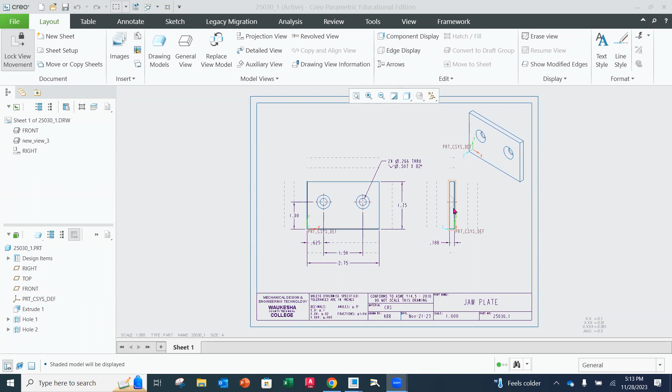Yeah, I don't know, I guess the markup I got for it was to change it. Let me see if I can go find it. Yeah, I think if I remember correctly, David, and not to share your grade or anything, I believe the comment was, when you look at this view right here, there wasn't enough edges to really see everything, kind of blended together.

Let me see if I have my... what number is it, 60? Yeah, it's 60. This one? No, it's not, that's the vice screw, I had 2 questions on that one too. 50 is the sliding jaw.

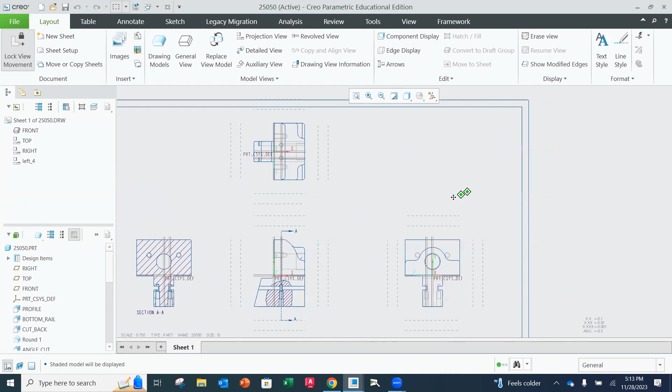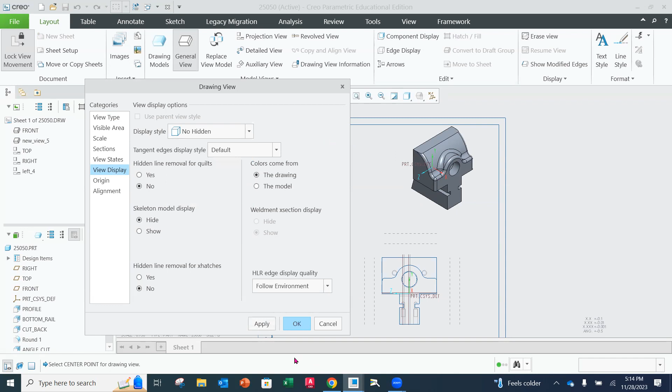Okay, so I don't have this drawing completely done, but let's put a general view up in the corner here and we'll add it and see what comes in. So right now this is going to be the display, it looks like it's just shading. I would add shading with edges at the very least, okay, because it gives you a better view of that. The one that I like the best is going to be the no hidden, I think that's what it is, like this. But it does have those.

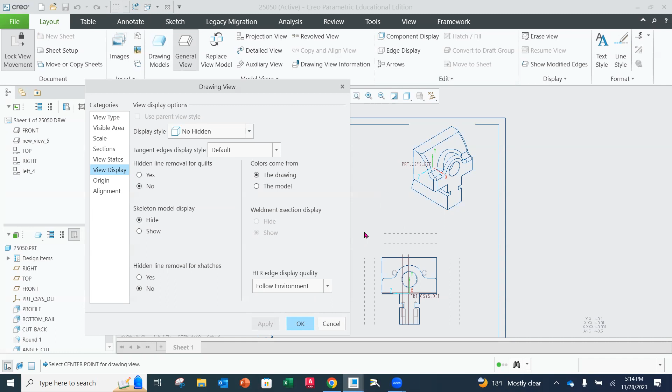I don't think there's a law against it. Again, this view is just icing on the cake - we can actually leave it off, it's not required to put it on at all. But I like seeing it because I think it adds a lot, especially for people dealing with your drawings who aren't as versed in the mechanics of visualization. It helps a lot, so I think it's nice.

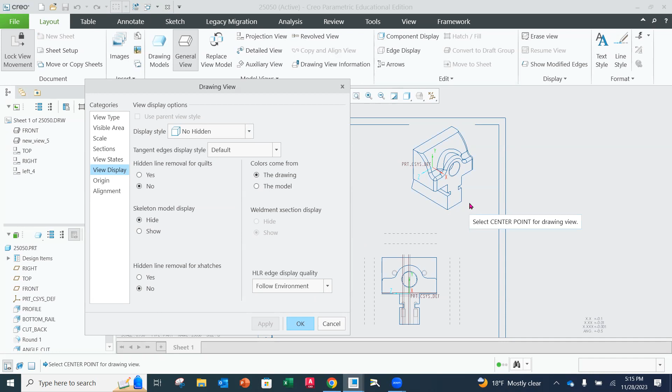But what you can do if you want to mess around with it, I actually cover this in this video for the individual drawing. Oops, I didn't save it - hold on, general view, let me go back in.

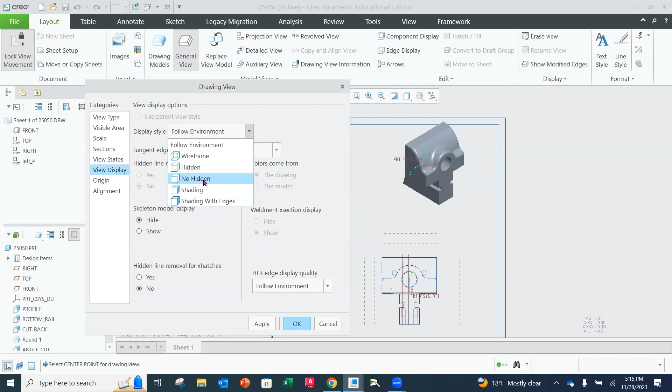So I set it to phantom because years ago I learned that tangent lines, if they're on the thing, can't be shown as object lines. So I made it a rule that if you had to show it - since that was a major part of seeing what it actually looks like - to make them phantom lines, just so there's an indicator that it's not an object line.

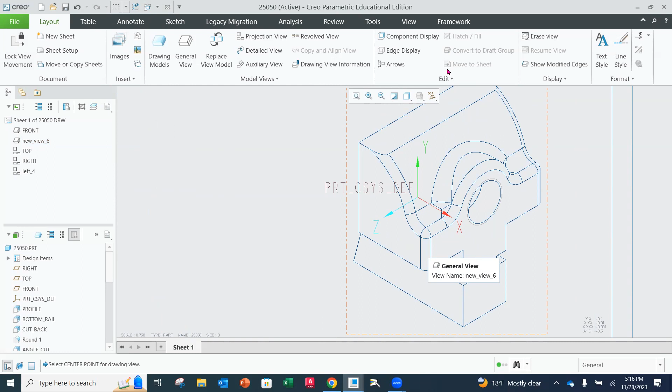Which is what I just changed it to, and I was wondering if that would be okay. Yeah, I mean, as long as it's more than what was there, because like you said, it kind of washes everything away and it's like, what is this?

But what you can do is put all the tangent edges in, and then on our layout ribbon you'll see there's an edge display option. If you click on that, you get a menu manager here, and you can erase some of those lines.

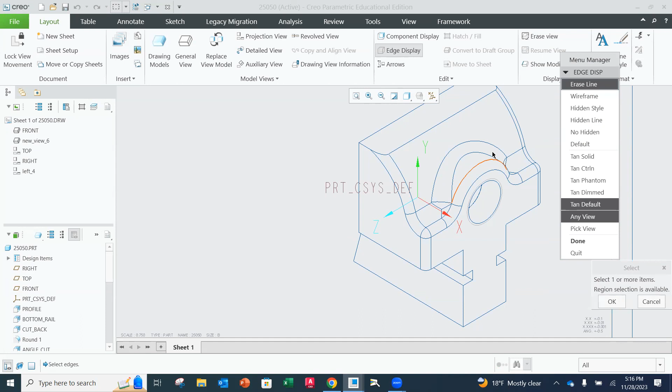Now the trick to this, and I do talk about it in the video for this sliding jaw, is when I erase the line, it's asking me to select objects. So for instance, I don't know which ones I would end up with - probably this one I would get rid of. I'll pick a couple here so we can see.

Now I'm holding the control key - maybe not that one - and I'm just selecting multiples here like we can for other applications. So I'm getting rid of lines that I think aren't really going to be needed. I'm just going to stop there for right now.

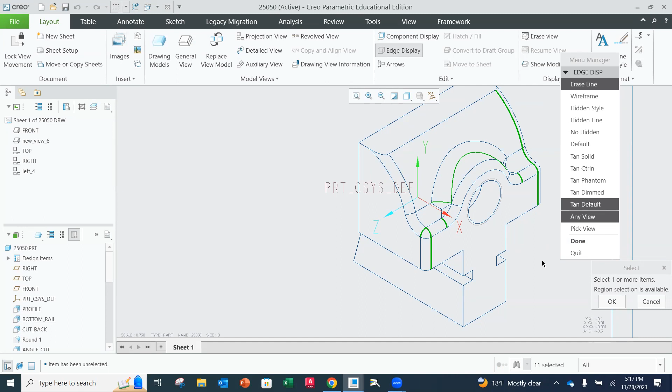When you're satisfied with your selections, you need to not click done, and you need to not hit your middle mouse button like we normally do for a lot of things. You have to hit the enter key and then they go away.

So you'll notice here already it starts to look a little better, right? Yeah, even with some of them in there, but not all of them. So if you wanted to play around and do that, you certainly can.

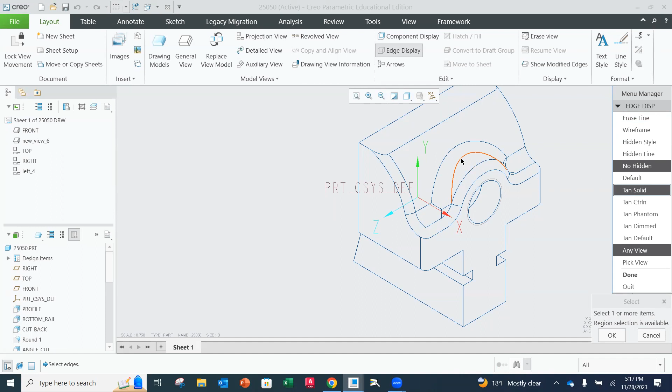Now if you delete something and you want to get it back, you have to go back to that edge display, and this time you have to say solid or tangent solid, and click that. Then as you go over the top of ones you got rid of, like this one right here, I can select that, and now when I hit enter, it's back in.

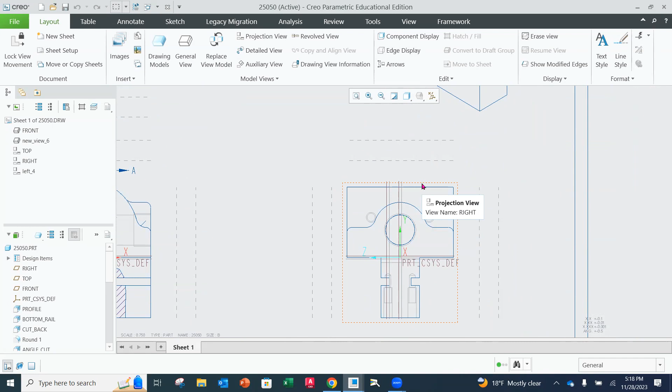I do talk about that because in the views here as well, we get that all-or-nothing type of effect. If you've already handed this in, I'm not going to have you redo it, but it's still worth looking at, because in this view, if I go into properties and go to display...

Notice I have hidden and I do have the default, or it would be solid there. But if I put none on here and apply, notice that it takes all of that stuff away. And all of a sudden it's like, okay, I have to dimension that 3/4 inch dimension and there's nothing there to dimension to. So I'm going to put it back on the default and apply.

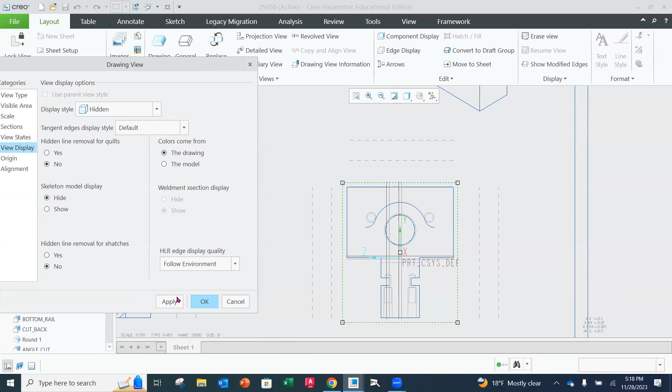And then there were more lines in here, but what I did was go through and put it on the default, so you were seeing all of those tangent edges. Then I went through and picked out the ones from that edge display, erased the lines, and selected them individually, then again hit enter at the end. Otherwise, if you hit done - because that seems pretty intuitive, like 'oh, I'm done' - it won't work right.

Or if you hit the middle mouse button, like we do for a lot of other things, to end the command, you'll see nothing happen. You have to hit the enter key. So that's that.

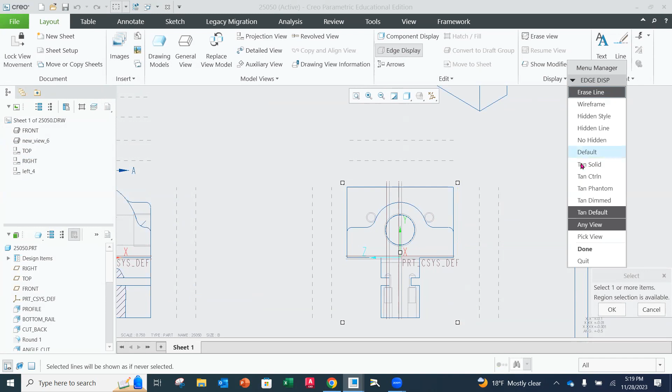Play around with that. In this video, I show you how to do that as well as adding in planes so that you have planes for creating the sections and the local section here. After that, it's really just the details. Putting the dimensions on gets a little bit easier, but creating some of these views is a little more involved.

I see there's a chat over here. I just can't get cosmetic threads. I know we're going to talk about that too. Actually, I do show you guys that in a little bit. So is there anything else before cosmetic threads?

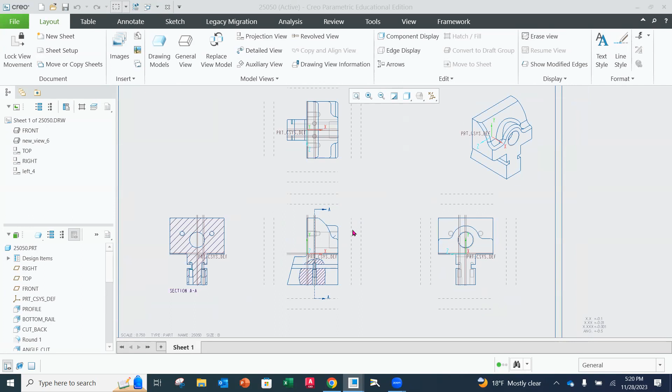Did have one other question on that. Yeah, go ahead, David. So I used the hole feature with a drilled hole to get on the backside in your section. I used that to get it in there, and then I used the note on the drawing because I used the 1/4 20 UNC, like all the stuff that was on the drawing. It input that in for me.

And then I guess, was I supposed to use the dimension instead? Because you crossed off a bunch of the stuff on it, and I wasn't sure. Okay, yeah, okay. So.

So when they add their standard note, because you use the standard note that came in, right? They just put too much in there. So all you need to add is, let's see here. I think it's on the guide. I'm gonna go underneath my camera, hold on, I gotta get it activated.

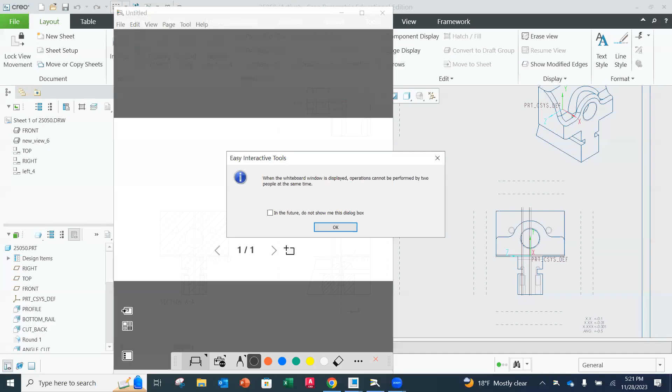You just want to call it out like this, because I think they add more information about the size of the drill and all that kind of stuff, don't they? Yeah, so it's a 2B drill, number 7, and it has the diameter of 0.201. So all you need to do is say that you're gonna tap it here, and they can figure out what standard size drill they're gonna be using. So, to tap drill that, and then you just want to make sure that your thread is 5/8 of an inch deep.

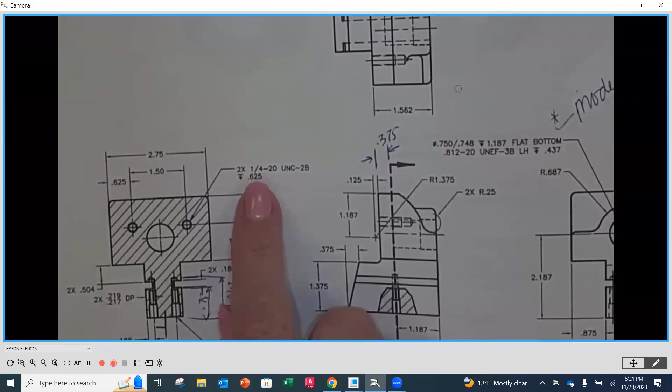So for all drilled holes like that, we don't want to necessarily call out the drill bit. We just want to call out the threads basically that are in it. Correct, yep. That just cleans it up and simplifies it. Years ago, we used to do that where we would tell them what the drill was, but it's no longer necessary or required.

So then should I just delete that information out of the note in the drawing, or should I just delete the entire thing and then use the dimension and add it into a note? There's the actual note from the hole in the 3D model that just comes in.

So if I do annotate, I think it'll let you manually change that, correct? I think so, yeah. So if I click show model annotations, you can go ahead and do that. Okay, so I can either do that, or I guess my other question was, do I just use the actual dimension on the left, because that's also there as the 0.201, and then I can add it in as a - I forget what it's called - like if you click the dimension and then it brings up the dimension text, I could add that in the text, like use the symbols or whatever, and I could say, hey, it's this.

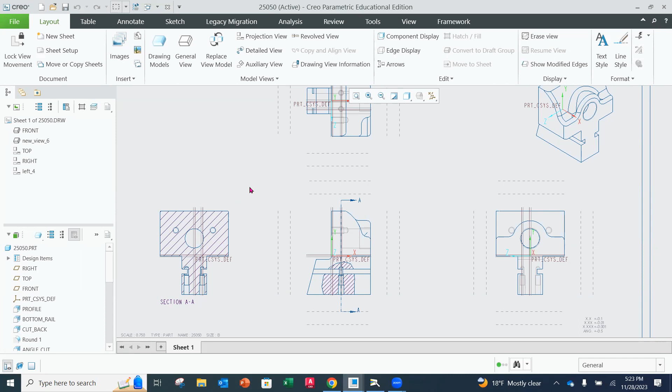That answers the majority of my questions. Yeah, there's a lot here, and I do encourage you - I think the video is about a half hour long, not gonna lie - but I go over the order of the model, how I created it, as well as going through each one of these, putting in the plane that goes through the hole so that you can get the local section, and then also setting up these views and such.

Okay, so it's pretty comprehensive, but this is where I kind of left it. I didn't add dimensions because in the previous drawings there was a lot more on dimensions and tolerancing and stuff like that, which I think students are getting. But some of these things, getting it to look the way it's supposed to, gets a little tricky.

There's been a lot of question stuff, some of it about adding the visual threads, which it sounds like you're about to go over anyways. I am - cosmetic threads we're gonna go over. Perfect, anything else besides cosmetic threads?

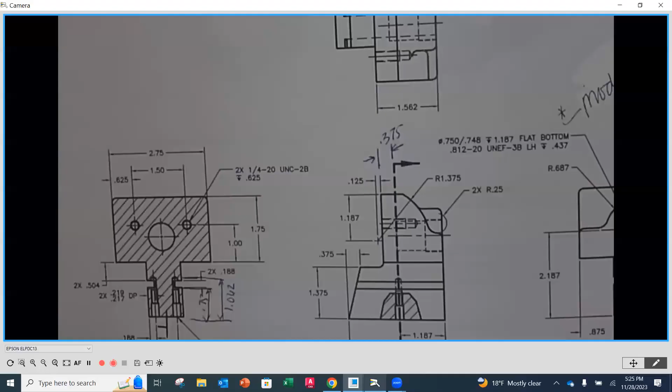So with cosmetic threads, what we want to occur is when the threads are put in, we don't want to take up data to draw each and every one of the threads that would be in there, especially when we have big assemblies that are going to have potentially a lot of fasteners and threaded holes. It takes up a lot of data unnecessarily and it'll slow things down. So the standard is to put them in as a cosmetic or simplified version, as we see here.

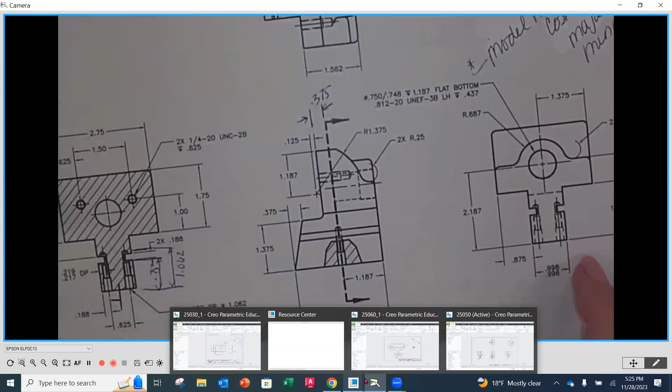And when we show a threaded hole, for instance, if I have this as a face and show it like this, we're going to show it as 2 hidden lines - one for the outside diameter or the major diameter of our thread and one for the minor diameter.

Now, the last time we were together, which was just last night, we were having difficulties getting those to print out - meaning we would call them out in the model and they're there, but then when we would actually do the drawing, they wouldn't show up. There would just be a line on line, it seemed. So I did find out why that wasn't happening. I did a lot of research, but it's not so much that they're not being printed - it's just that we have to identify what that major and minor diameter is, okay?

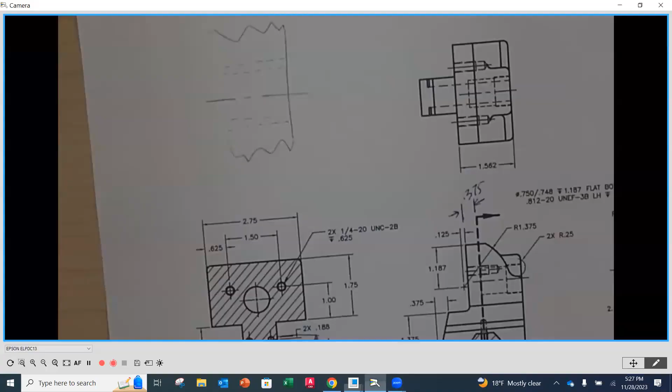So I'm gonna go into our model for this drawing. That means I've got to go File, Open. I'm gonna pull up the part file itself, okay? And we're gonna go over to the cosmetic thread for this hole right here. Now, before we do, I'm gonna go back underneath here - the call out for that thread is right here, okay?

If you guys already - if I hear a lot of clicking, so I'm hoping that maybe you got this already figured out and you've got cosmetic threads done. But if you don't, this is a good time to tune back in with me. So we've got a...

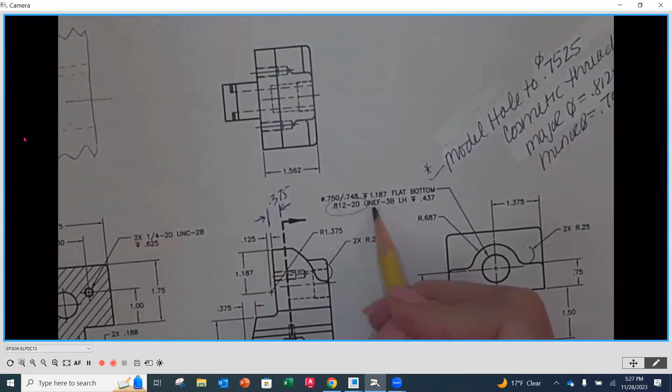0.812-20 UNEF. That means it's a 13/16 - that's going to be like the major diameter. -20, that's 20 threads per inch. It's a unified national thread and it's extra fine. Okay, so we're not going to find it on our list.

So what I did, and this is what you would do too, is do a quick Google search. There's a lot of good information out there and we just want to know what is the root or minor diameter for a 0.812-20 UNEF. That's all you want to know - what is the minor diameter or the root diameter for that. So that root diameter comes out to be 0.7525. That's like the tap drill size that we would use for it.

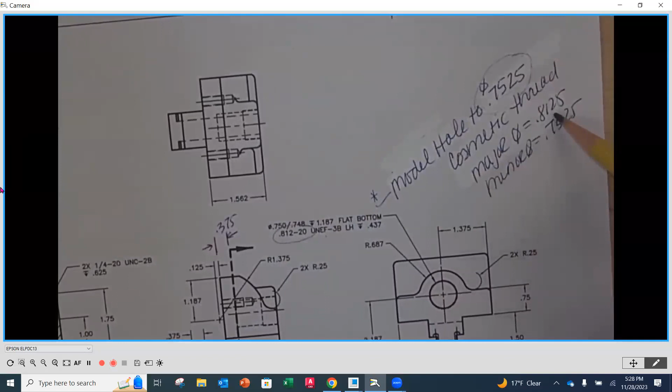So here is that size. Then what we're going to do is, when we do our cosmetic thread, this is going to be the small hole on an internal feature - that's what we're going to model it at, okay? And then when we do the cosmetic thread, we're going to manually put in the major diameter and the minor diameter, because when we weren't doing that, it would actually have the same major diameter and minor diameter.

So it was like going over the top, even though there was actually a cosmetic thread going in, all we have to do is tweak this. And now we just have to make sure those are two different numbers that coincide with what they're supposed to be. And now we're going to get to see that offset.

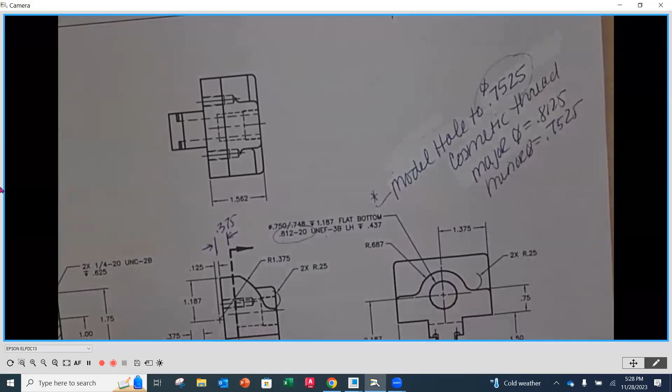Okay, so I'm going to show you where we do that. This isn't exactly how I do this in the video, but I'll show you here because this will apply to the other things we're working on. Go back to Creo. I'm going to go into this hole right here that I created. This is the 0.7525 hole, so I made this to the minor diameter.

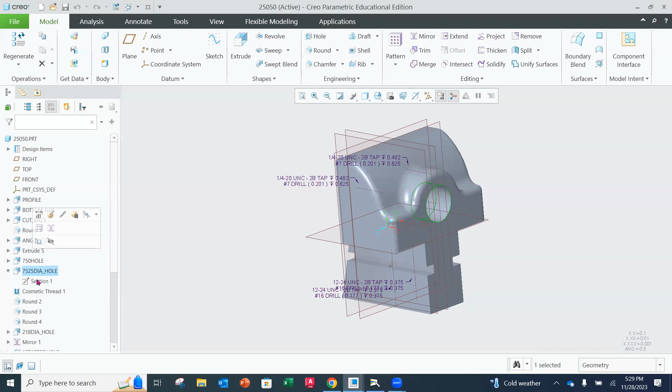So if you want to put this hole in and go to the sketch, make sure that this is not the 0.812. I think I told you guys to do that before, just put it at the major diameter and put it in there. We want to put it at the minor diameter of this actual thread size.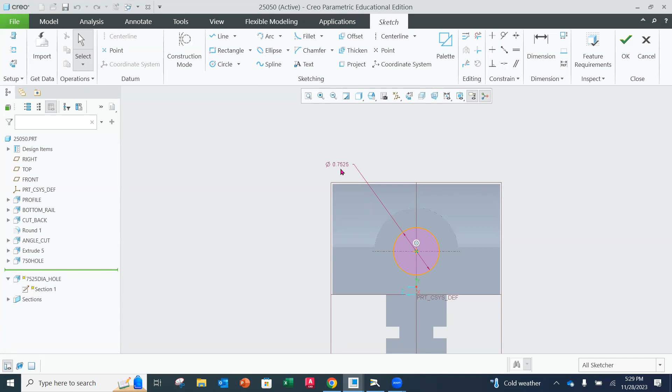0.7525 is the diameter, and the depth here is going to be 0.437. That's the depth of the thread portion. And once you have that in, that's okay. Then you're going to add the cosmetic thread.

To add the cosmetic thread, go up to engineering and click on cosmetic thread. Now when we do that, I'm going to go into mine right here and edit the definition. You're going to keep this on simple thread. Don't go to standard because the standard isn't over there and we can actually create it here. So we've got a simple thread.

We're going to put the diameter at 0.813. That's our major diameter, and that's really the nominal size of the thread. Our pitch is going to be 20 - that's how many threads per inch we're going to have. If we counted along a 1 inch length, we would get 20 peaks in there for the threads.

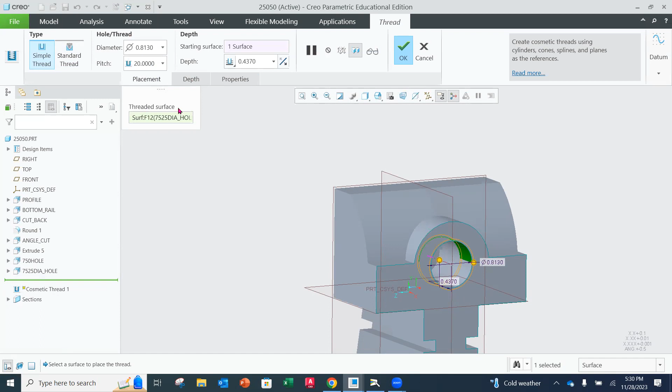Now we're going to go through that same process of placement. We're going to put it on this surface, the inside surface here. You select that inside surface, and then do the starting surface - it can be the outside surface. Here would be your starting surface for where the threads start. And then your depth is going to be a blind depth this time, because we know it's 0.437. Okay, so that's the information we were filling in before.

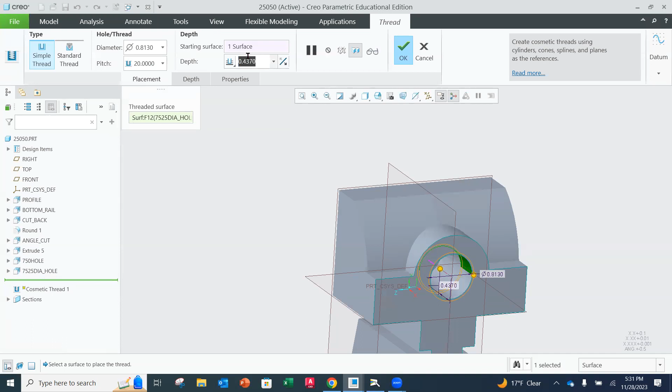But now the change comes over here in properties. There's a tab here for properties. You'll notice that the major diameter, that's going to be the 0.812 - if you have to key that in, key it in. 0.812, it might actually be at 0.7525. If you're doing it along with me here, make sure your major diameter is 0.8125 or 0.813.

And then your minor diameter at the bottom is going to be the number we just talked about, the 0.7525. Before we do this, there's a difference between these two. If you went in there, you'd notice that whatever your major diameter was, so was your minor - those two numbers were over the top of each other. That's why we weren't seeing them come through in our drawing.

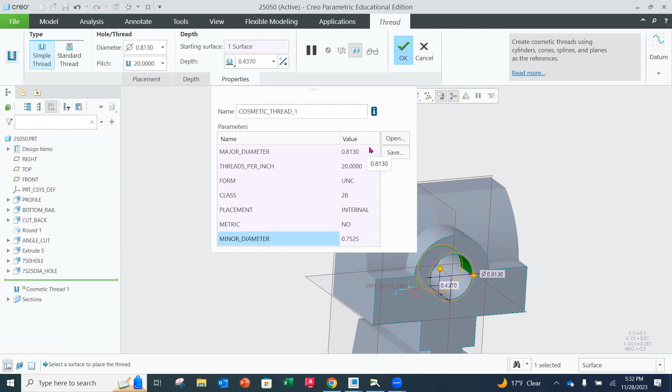Now you don't really have to do anything here, you don't have to hit save or anything like that, because now it's going to draw it and you just simply hit OK. And that's it. Now when you go here, you'll notice that yeah, there are actually two diameters.

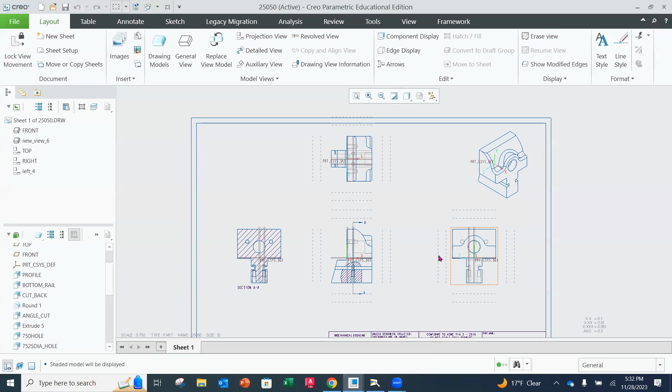Okay, there's two diameters. And when we go over to our drawing then, so that's in there - when we go to our drawing, oopsie, wrong one. When we go to our drawing and I go in here, look, I've got two lines now. They're showing up, so the cosmetic threads were there. We just had to identify the major or the minor diameter.

And that's what you're going to want to do for any other cosmetic threads that come up. So like on the vice screw, you're going to do that, on the hole on the base - so in those couple of places.

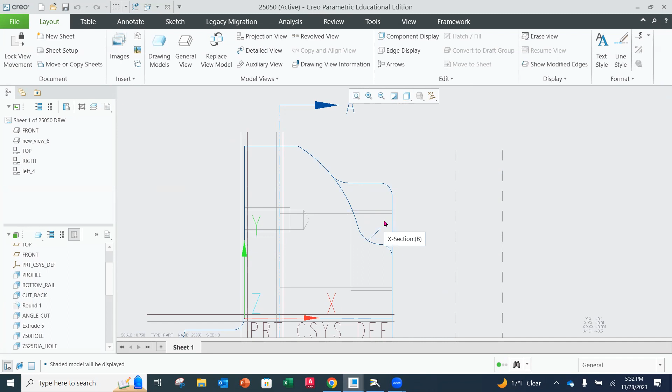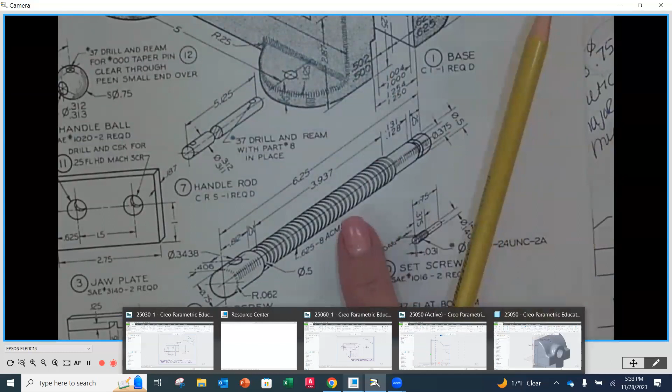If I go underneath here, we're going to have to do it here, because anything that's like a 1/4-20, we can do this on the hole wizard, right, and that one comes through fine. But this one, because there isn't an Acme thread, we have to do it manually. So we have to do a cosmetic thread for that one, a cosmetic thread for this one, and then a cosmetic thread for this internal one and for the collar.

So when you watch those videos, you're going to notice that I go through that again, in that manner that we just talked about. Does that help and make sense for you guys?

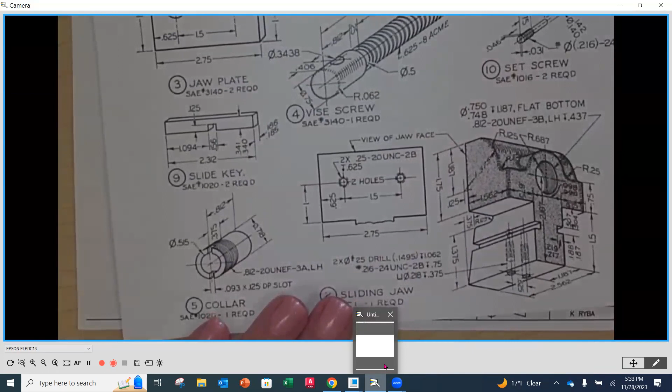When you call it out and it pulls in, it's going to dimension the individual diameters. You don't want that. You're going to call it out as your standard note, so you would do a note and attach it to that surface. Because it's going to give you a diameter like 0.812 and 0.752, we don't want to dimension it like that. We're going to do it all in a note.

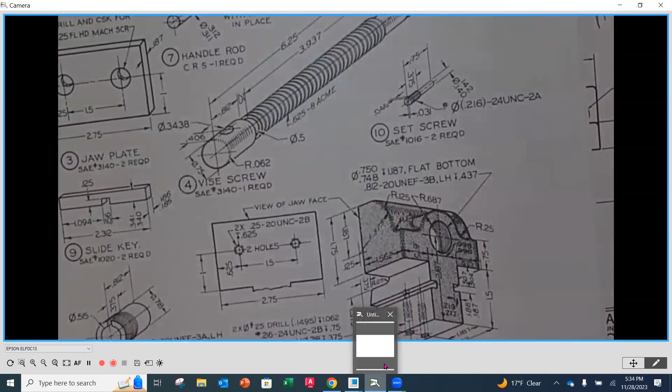So Jeffrey, does that help? Okay, so play around with that. And you may still have questions wondering what those are.

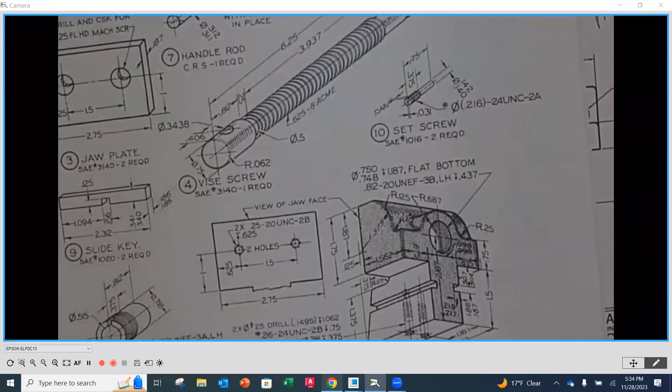Meaning the diameters that correspond to it, I put in our resources here in the learning plan for module number 5. This has been in there, but if you need to, a good reference to figure those out is that drill chart. It's a Starrett drill chart.

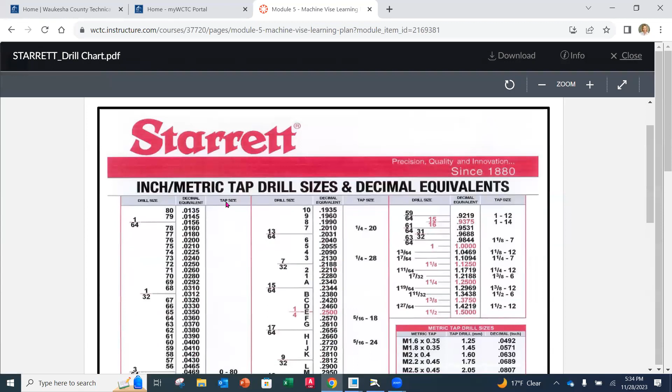So if you're doing, for instance, the 1/4-20s, what you're going to do is find your tap size. If we want to find the 1/4-20 tap size, it's going to be up here. Here's 1/4-20, its corresponding drill. So if we wanted to put the minor diameter in for that one, it's going to be 0.201. That would be the root diameter of those threads.

Now these are going to be for the most common ones. For that one we talked about, the 13/16-20 UNEF, that one's not on here. That's why I had to look it up on Google.

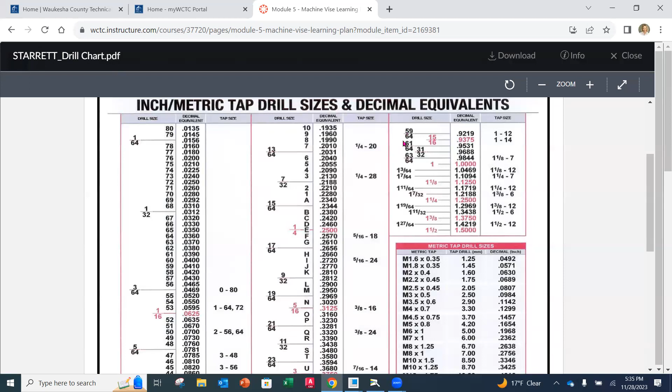So feel free to use that as a resource too. Google is really good. The only thing I would warn against is maybe not going with your very first result. Maybe find an answer and then verify it in at least one other place. If you see it in at least 2 places, you should be good. Or if you have something like a Starrett drill chart or Machinery's Handbook, that'll be a good resource. Other questions that you have as you're doing these details before we move on to assemblies?

Okay, so if there aren't any more questions on the details, is there any other questions besides that? Chris, you were working on the borders, are they coming in okay now?

Now they're working, yeah, okay. It was, you're right, it was about the type of file. Oh okay, the format wasn't in there for it, okay. All right, good, I'm glad.

Yeah, I'm going to repeat that one more time. Remember, the first time I had these out there, the Creo borders, I apologize, I didn't realize it because, as you know, if things are in the background, it has to all be there, but there was an error coming up. So these are the new ones. If you downloaded these previous to me putting the new ones in, or if you're pulling these up and getting an error, then you know you have the old ones in there.